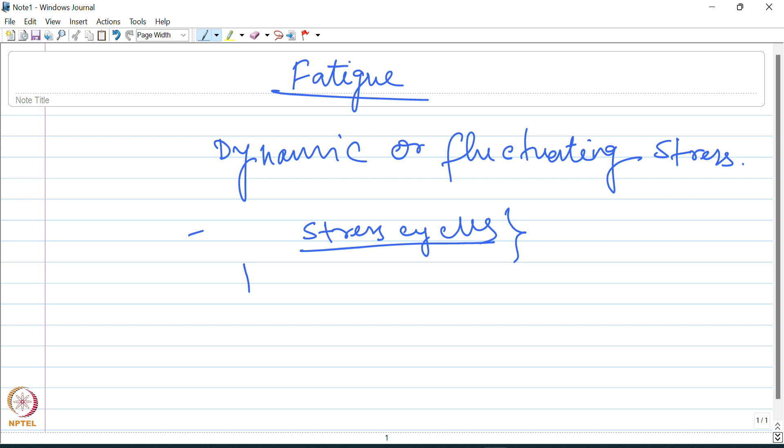Fatigue failures occur under the conditions of dynamic or fluctuating stress. At this point it will be good to know what kind of typical fluctuating stress cycles are generally encountered in engineering components. When you talk about these load cycles or stress cycles, you may have a completely reversed cycle such as this one, in the sinusoidal form. It first goes toward the positive direction to a peak and then comes down, going all the way to the negative direction with the same amplitude.

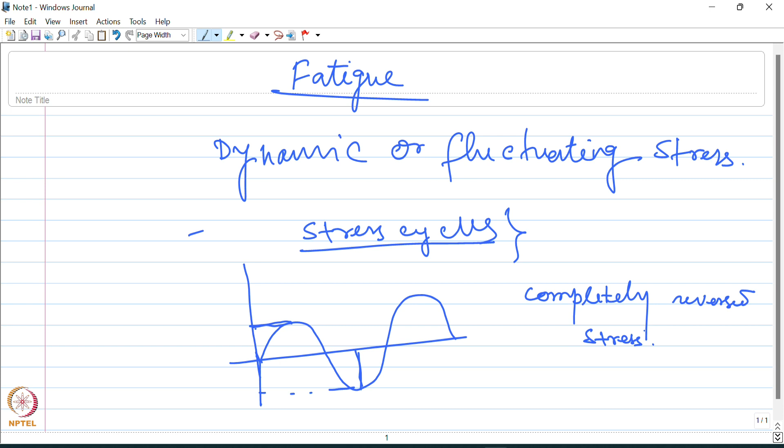When this occurs, this is known as a completely reversed stress. But it does not necessarily have to be completely reversed. There could be other kinds of fluctuations also. For example, you can have a stress cycle like this.

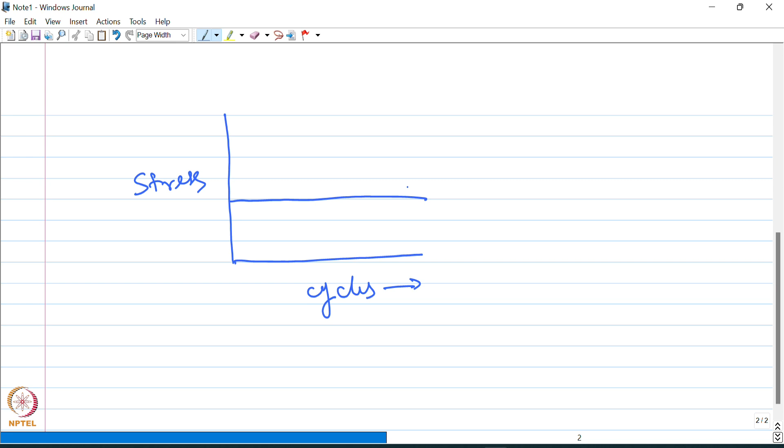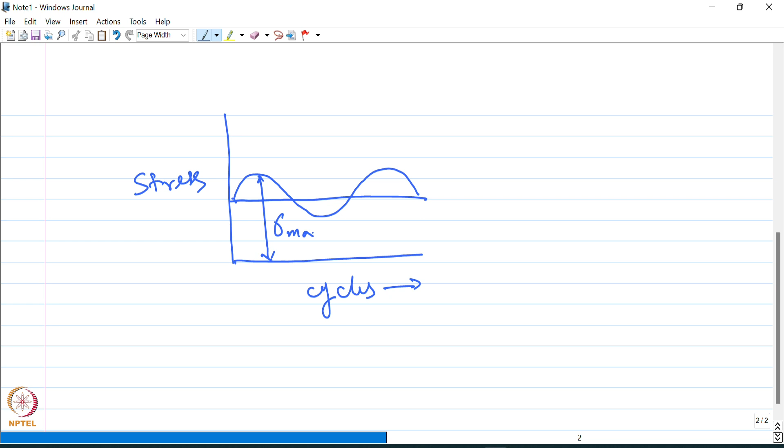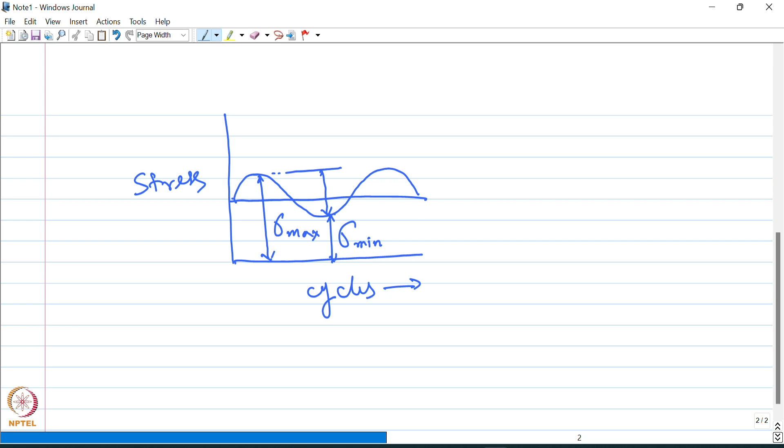In stress cycles, you have parameters such as the maximum stress sigma max, the minimum stress, and the stress range sigma r, which is equal to sigma max minus sigma minimum.

A stress cycle like this can be thought of as made up of two components mainly: a mean or steady stress sigma m, which is nothing but sigma max plus sigma minimum divided by 2, and an alternating or variable stress sigma a.

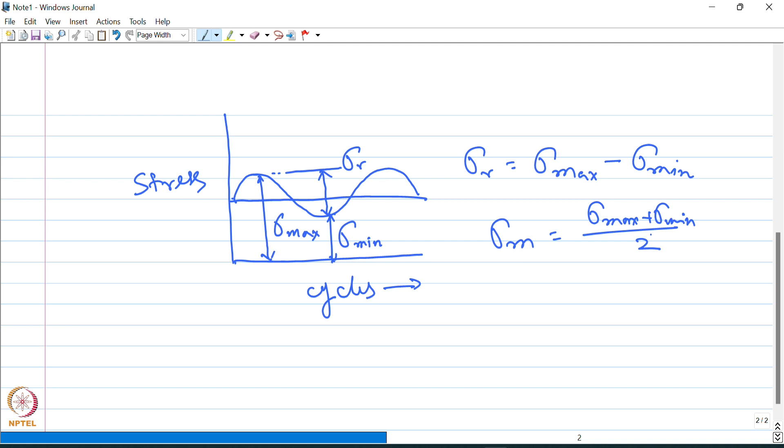Apart from this, as I said before, you also have the stress range sigma r. So in the previous case, when it is completely reversed, sigma minimum and sigma maximum are equal and opposite to each other, and in that case, the mean stress will be 0.

But as I said, it doesn't have to be always completely reversed. You might have a case like this where sigma max and sigma minimum are not equal to each other. And then you may also have a random stress cycle like this.

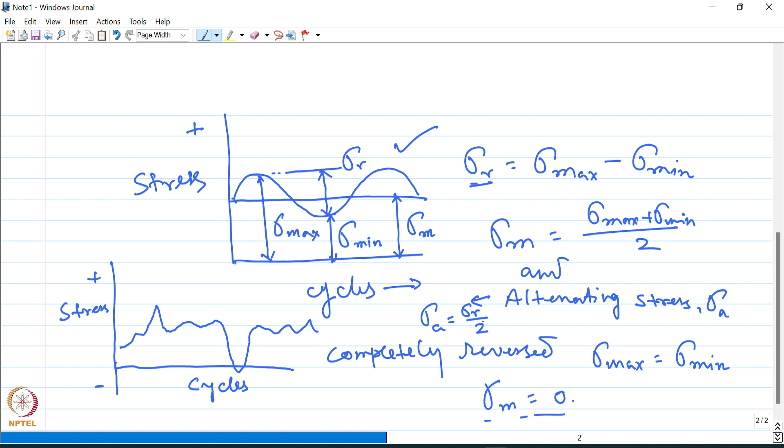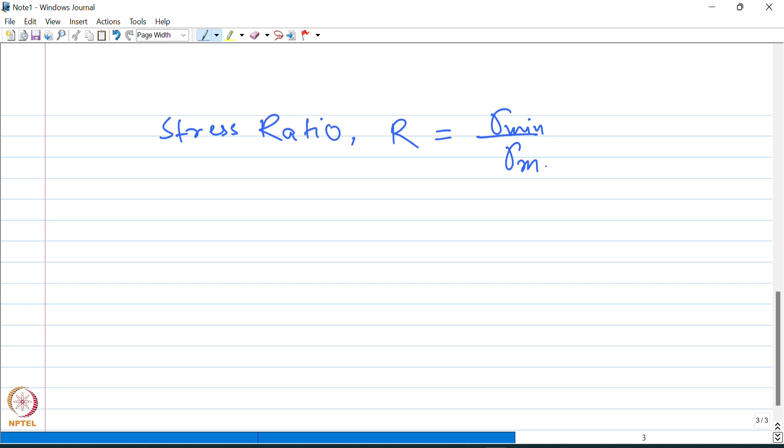There is one more parameter that is considered in fatigue, and that is the stress ratio written as R, and it is equal to sigma minimum by sigma maximum. So for a completely reversed stress cycle, R will be equal to -1.

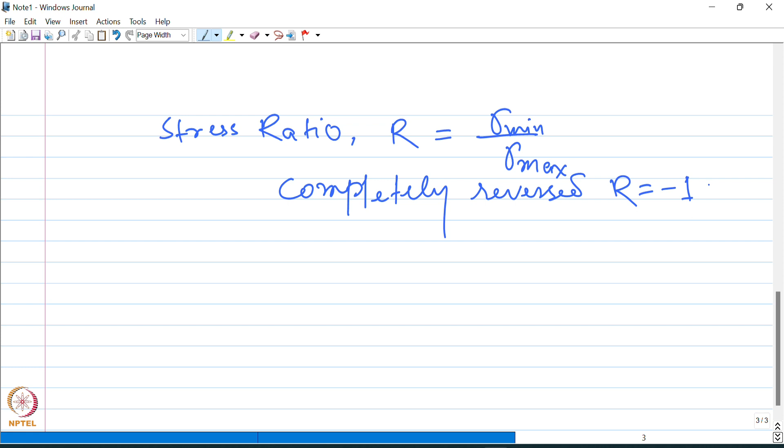There is one more parameter called amplitude ratio A, which is given as sigma A by sigma M, and if you write it in terms of R, it will be 1 minus R by 1 plus R. So these are the different parameters with regard to the fatigue test or the fatigue property.

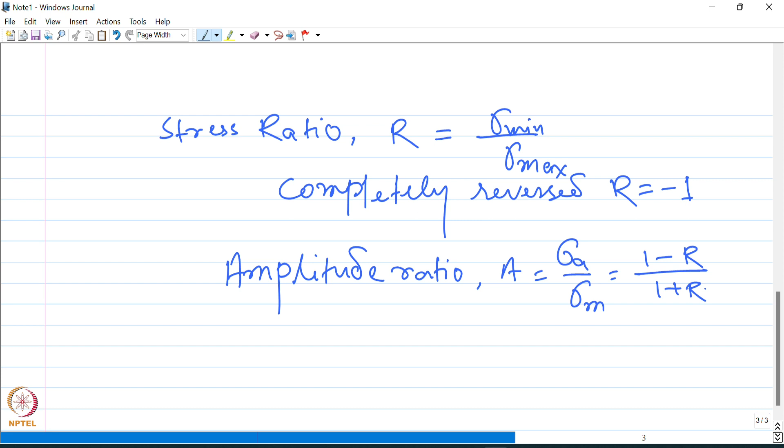Now let us see how the fatigue data is represented. The fatigue property is generally represented as a fatigue life in terms of the number of cycles to failure at a particular stress. So the fatigue data is collected as a function of number of cycles at a particular stress.

This kind of curve obtained in this manner is known as the SN curve, that is stress versus number of cycles to failure. Generally the data is collected under completely reversed stress conditions. As the stress is increased, the number of cycles to failure or complete fracture will decrease. So this curve would typically look like this.

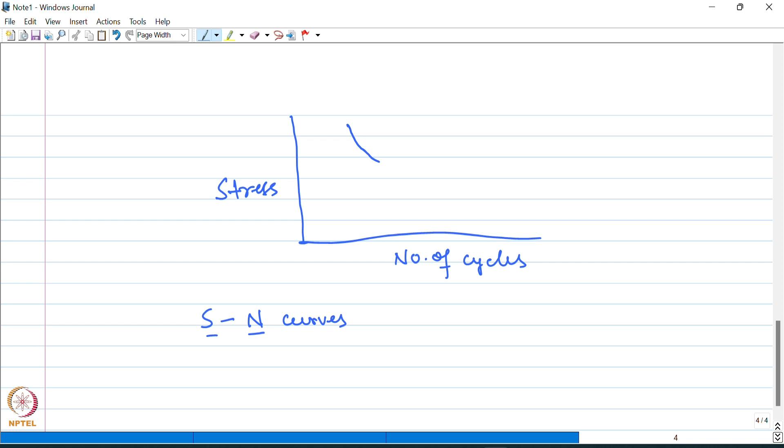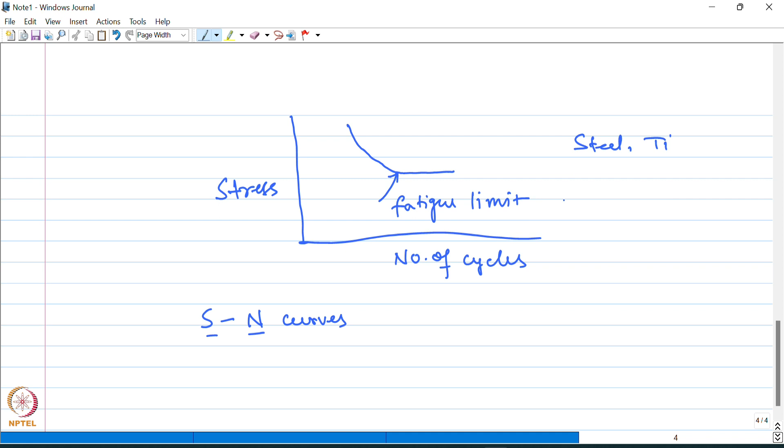For many materials like steel and titanium, this curve will become horizontal after a point. That particular stress at which it becomes horizontal is known as the fatigue limit of the material. This is also known as the endurance limit.

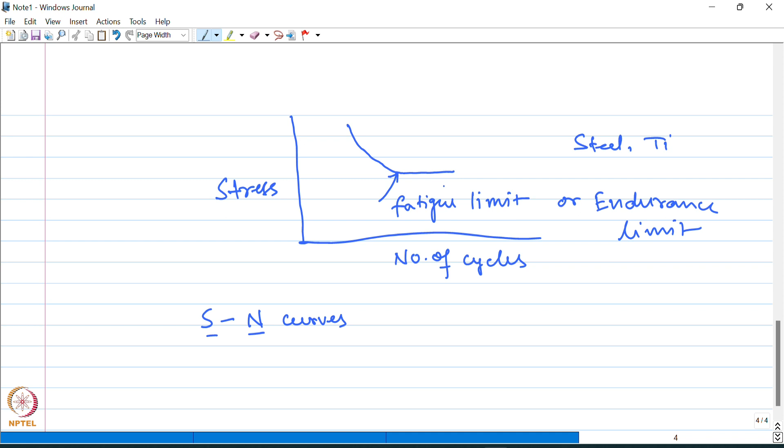But there could be materials where this curve does not become flat, rather it continues to go down. For materials such as aluminium and magnesium, that is what you will see. The curve goes down progressively as the number of cycles is increased.

In such materials, there is no well-defined fatigue limit as such, and therefore for such materials, the fatigue life is defined at a particular number of cycles, for example 10 to the power 8 cycles. So the fatigue life is given with respect to a particular number of cycles, a high number of cycles such as 10 to the power 8 cycles.

The stress at which the material can go up to 10 to the power 8 cycles, or the stress corresponding to 10 to the power 8 cycles, will be taken as the fatigue strength of the material, in cases where there is no well-defined fatigue limit. This curve can be expressed by an equation, where N and sigma A have already been defined before, and P and C are empirical constants.

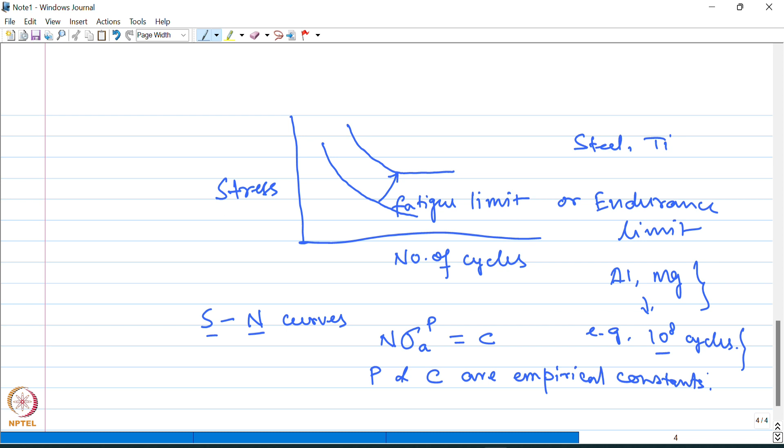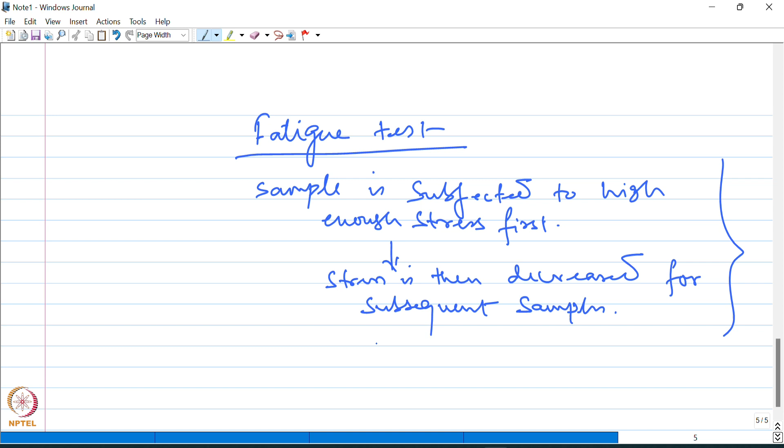Now let's talk about the fatigue test and how these curves are generated. The test is conducted by subjecting the material first to a high enough stress where failure is expected at a fairly smaller number of cycles, around two-thirds of the tensile strength. The test stress is then progressively decreased for succeeding specimens until at one point the specimen does not fail at that stress. This continues till a specimen does not fail at a low enough stress. When the data is plotted in this manner, it gives rise to the SN curve.

Whatever we have discussed so far was under the condition of completely reversed stress cycle, where R is -1 or sigma m is equal to 0. But practically it is very likely that the stress cycle may not be completely reversed. So we need to consider how the material behaves when subjected to a stress cycle which is not completely reversed. Let us see how the fatigue data is represented in that case.

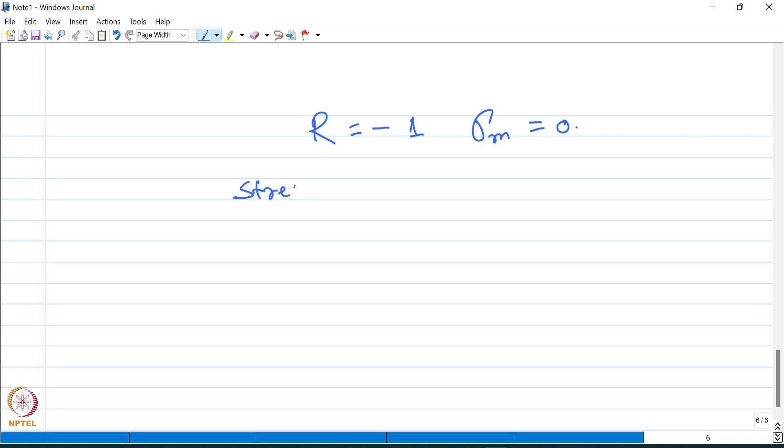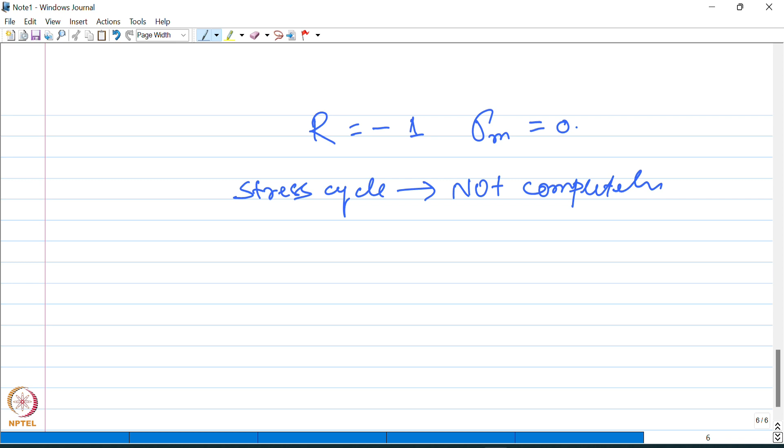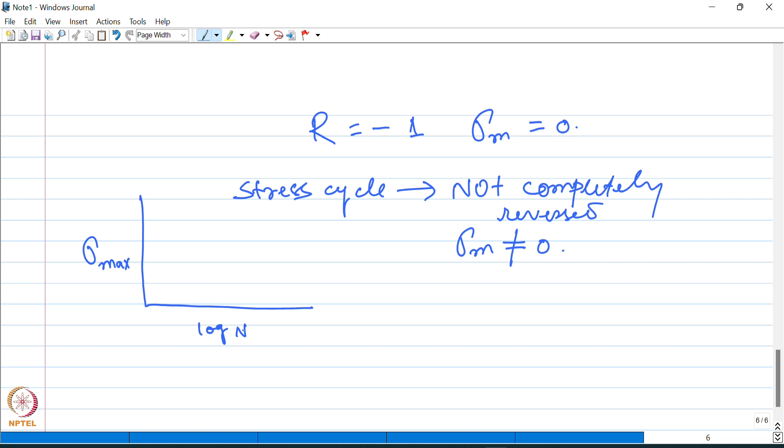There are several ways of determining the SN curve for a scenario where the stress cycle is not completely reversed. For example, it could be the stress at a particular stress ratio. So the maximum stress can be plotted against log of number of cycles for a fixed value of R. Let's say R is equal to plus 0.3.

The same data can be collected at different values of R. For example, R could be 0, then it could also be negative, such as minus 0.1 or even -1.

Here you can note one thing: as the stress ratio becomes more positive, which is equivalent to increasing the mean stress, the measured fatigue limit increases. As you can see, the fatigue limit, that is the point at which it becomes horizontal, increases as the value of R becomes more positive.

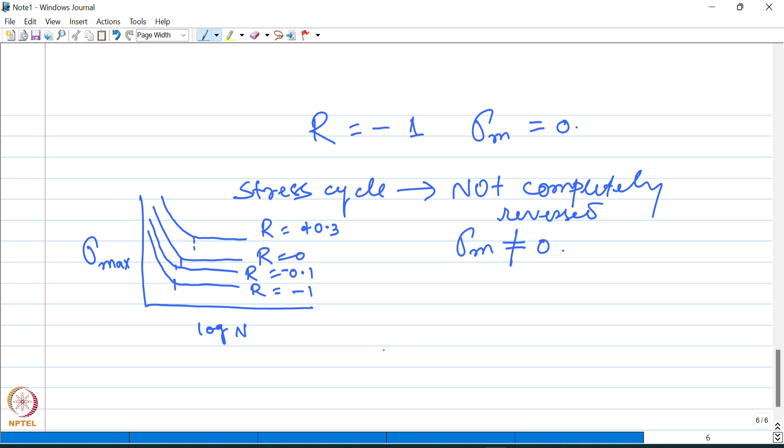The other way of determining the fatigue life in this kind of loading condition, where it is not completely reversed, is by plotting the alternating stress sigma A against the number of cycles to failure at a fixed value of mean stress. Let's say this is for sigma m1, and then the mean stress is varied.

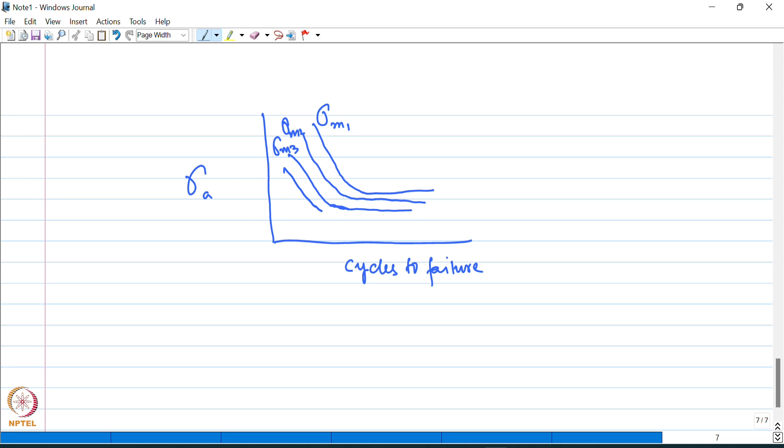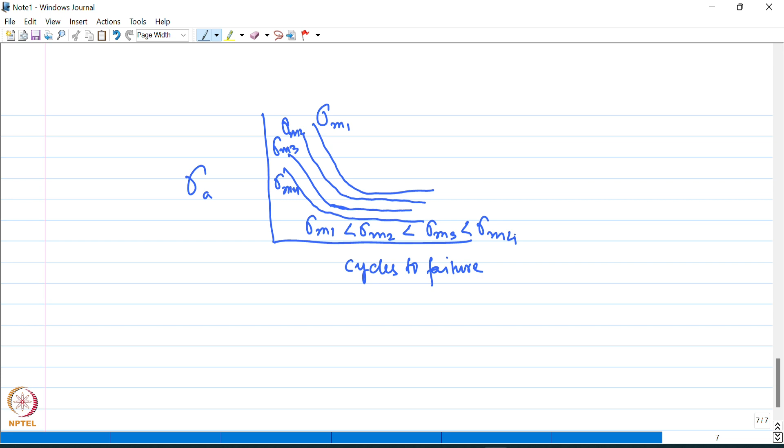Here sigma m1 is less than sigma m2, which is less than sigma m3, and that is less than sigma m4. So here you can note that as the mean stress becomes more positive, the allowable alternating stress decreases.

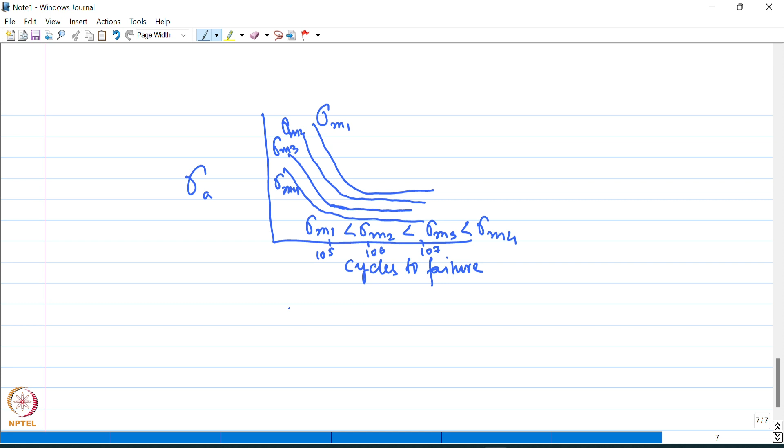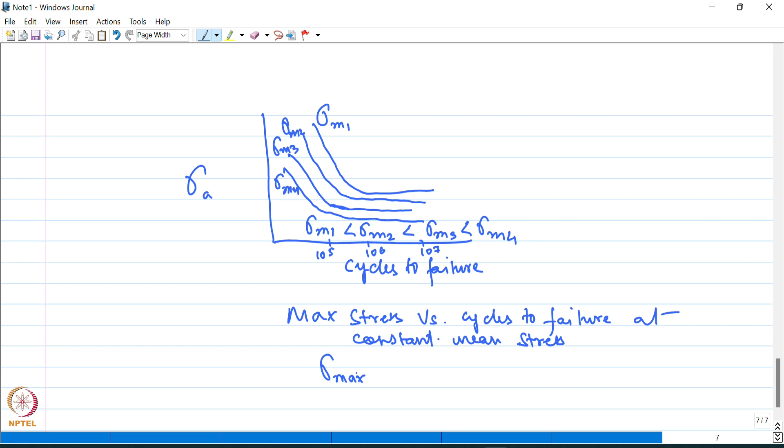There are other ways also to plot this data. For example, the maximum stress versus the cycles to failure at constant mean stress, and maximum load versus cycles at constant minimum stress, for example. So these are the other ways of plotting the fatigue data when the stress is not completely reversed.

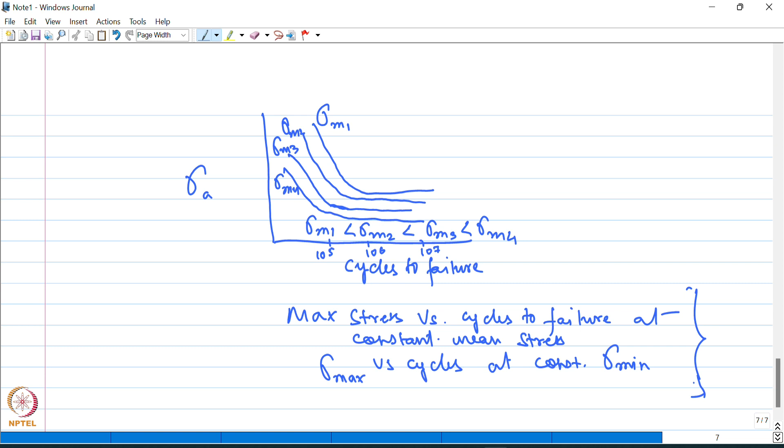The other thing that can be noted about fatigue data is the fact that for each mean stress, there is a different value of the limiting range of stress. This relationship between the mean stress and the stress range can be represented through a plot known as the Goodman diagram.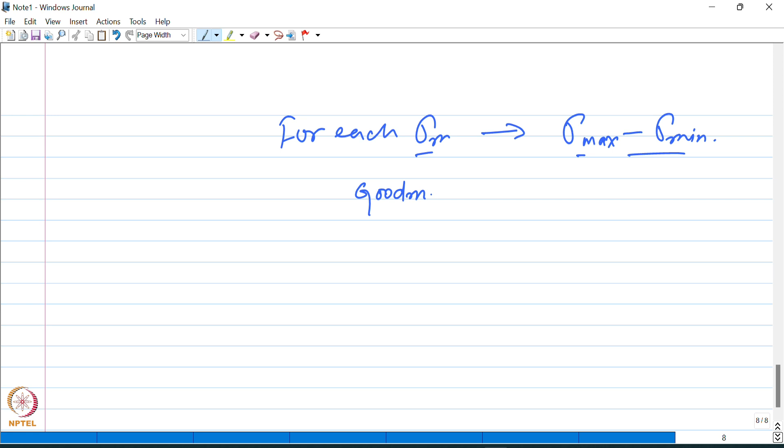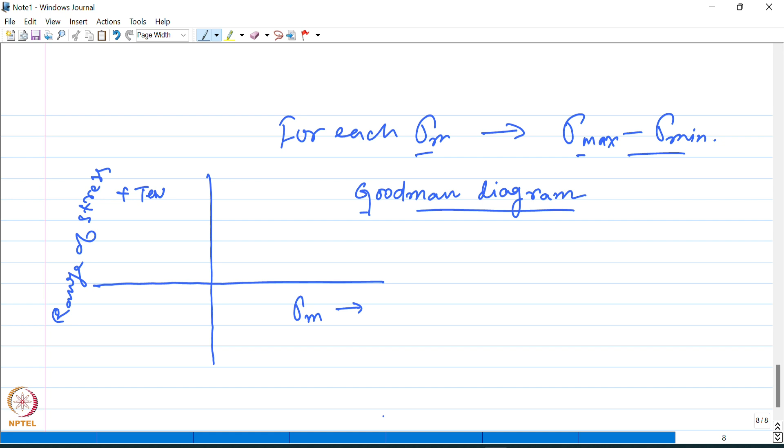So here, if we plot the range of stress along the vertical axis and mean stress along the horizontal axis, then you would get plots like this.

Here sigma u is the ultimate tensile strength of the material, and sigma naught is the yield strength. This plot or relationship is obtained for a fixed number of cycles, or at the fatigue limit of the material. You can see that as the mean stress becomes more tensile, the allowable range of stress is decreasing, until it reaches the tensile strength sigma u. As it reaches the point where the stress is equal to the ultimate tensile strength of the material, sigma r becomes 0.

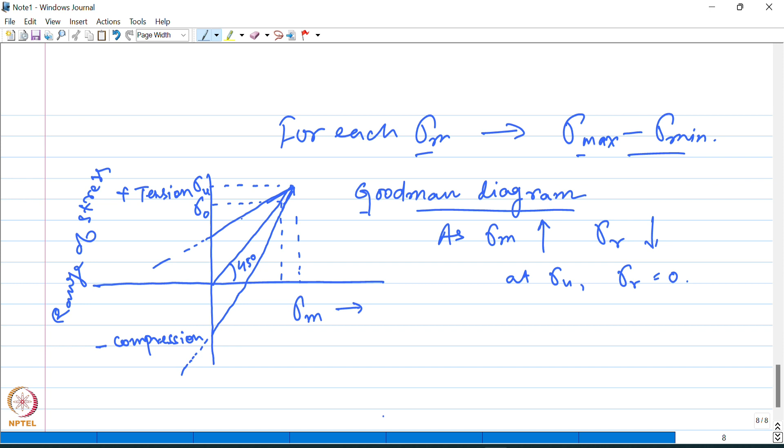Here this is the alternating stress sigma a, and sigma r is the difference between the maximum and minimum. So this is the sigma minimum curve, and this is the sigma max, the upper one, and therefore the difference is sigma r, or the range of stress.

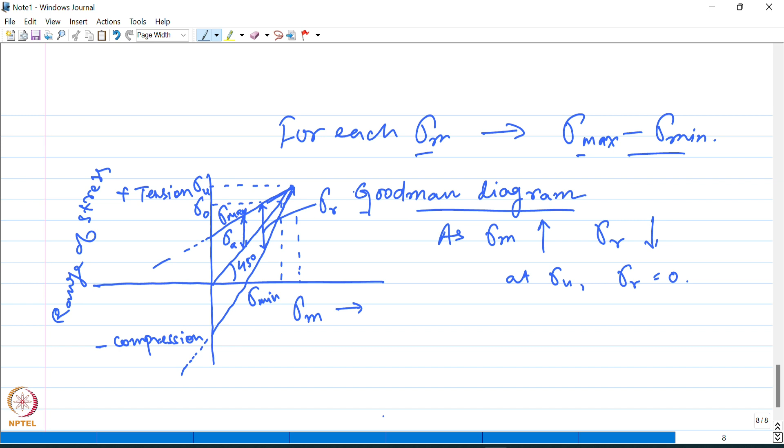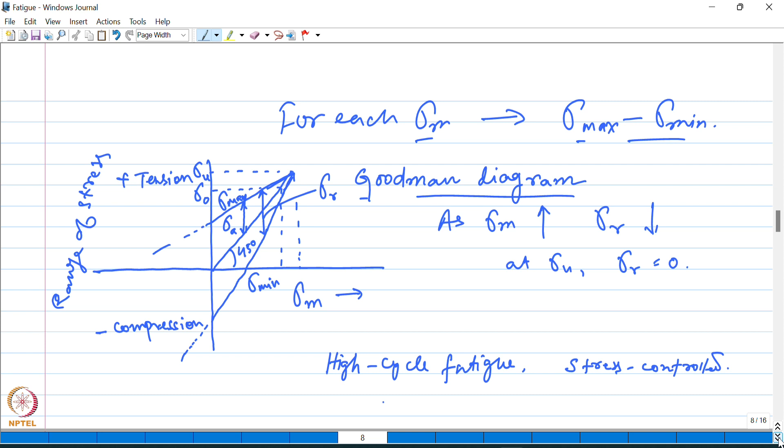The fatigue behavior that we have discussed so far is basically high cycle fatigue, and the data presented are basically from fatigue tests performed under stress controlled conditions. But scenarios are often encountered in which failure can occur at relatively high stress and low number of cycles. Such fatigue is known as low cycle fatigue, which occurs at high stress levels.

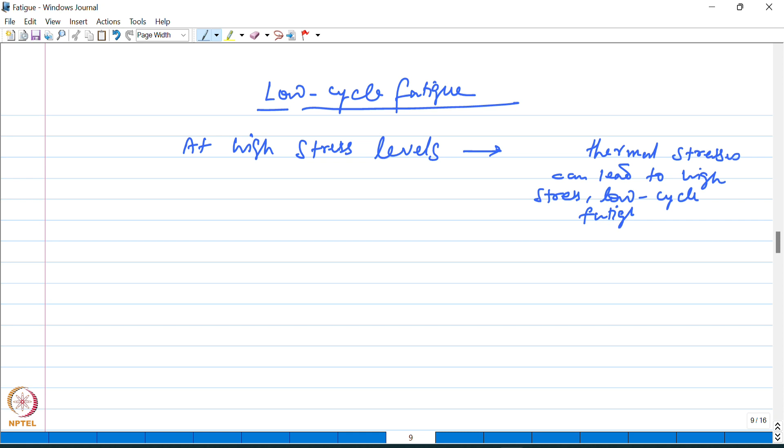Stresses of thermal origin, or thermal stresses, can lead to such a scenario. In these cases, fatigue occurs not due to cyclic stress, but rather due to cyclic strain.

So in order to understand low cycle fatigue, we will have to consider data generated from strain controlled fatigue tests. If you look at the stress strain curve generated under such conditions, when the strain amplitude is held constant, it will look like this.

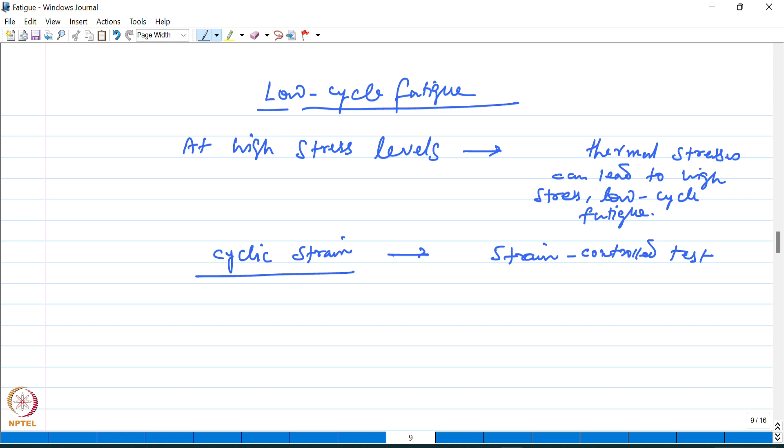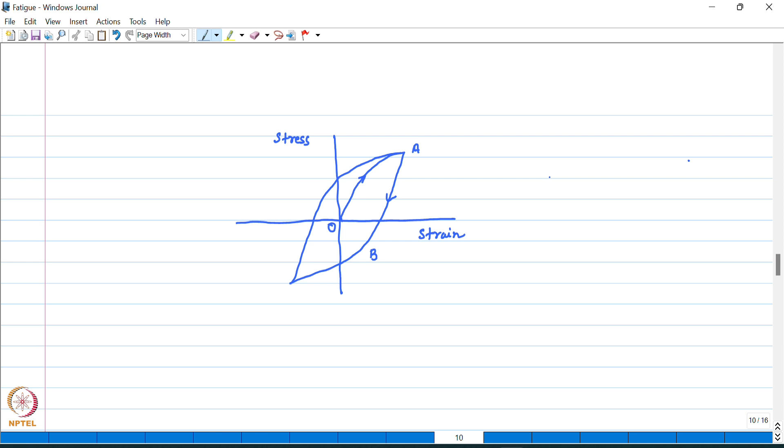So the lowering of the yield point when deformation in one direction is followed by deformation in the opposite direction is known as the Bauschinger effect.

Now, if it is again reloaded in tension, a hysteresis loop will develop, as you could see from here. The dimension or width of this hysteresis loop will be given by the strain range delta epsilon.

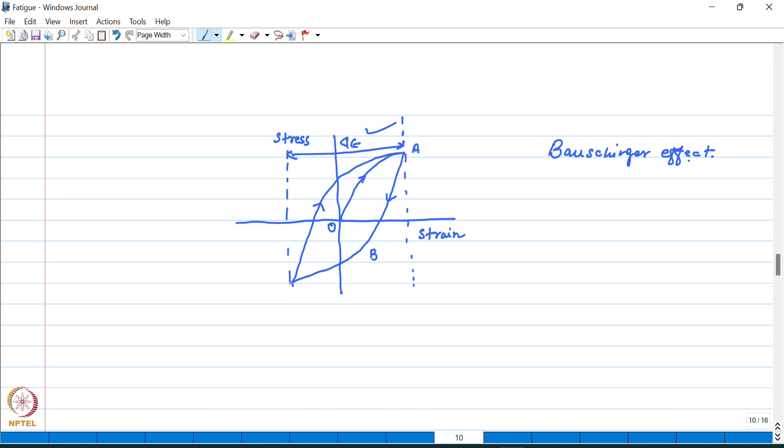You can also note that the total strain consists of an elastic strain, delta epsilon E, and a plastic strain, delta epsilon P. So the total strain delta epsilon T is equal to elastic strain delta epsilon E plus plastic strain delta epsilon P.

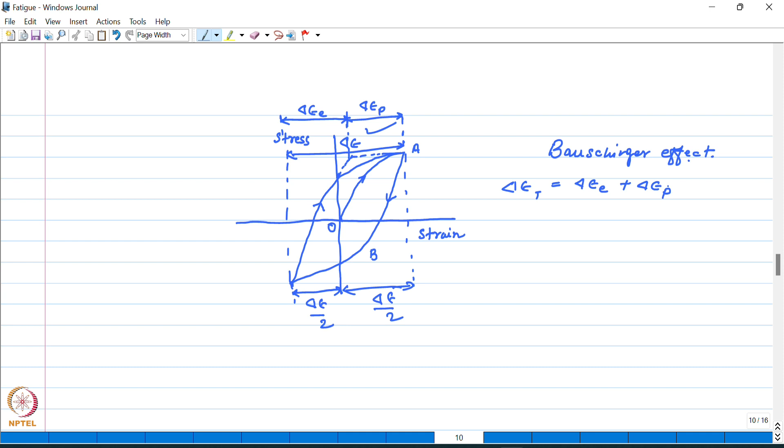The material may undergo cyclic hardening or softening, or may remain stable, but ultimately during the deformation process a stage will be reached where stable stress strain loops will be developed. So if you look at this cyclic stress strain curve, that can be found by joining the end points of these stable loops which develop.

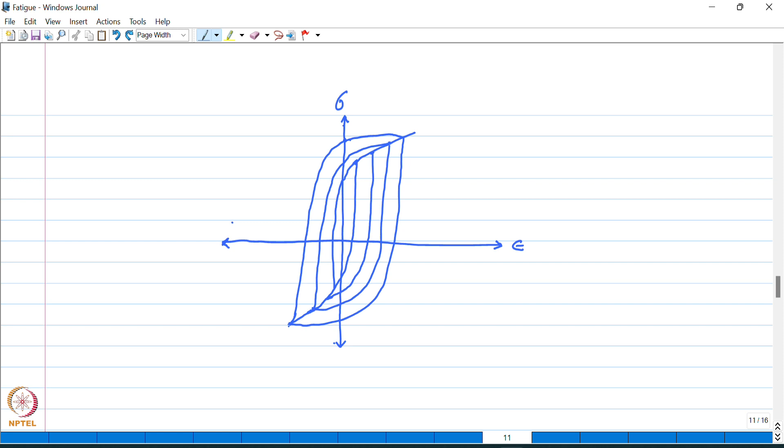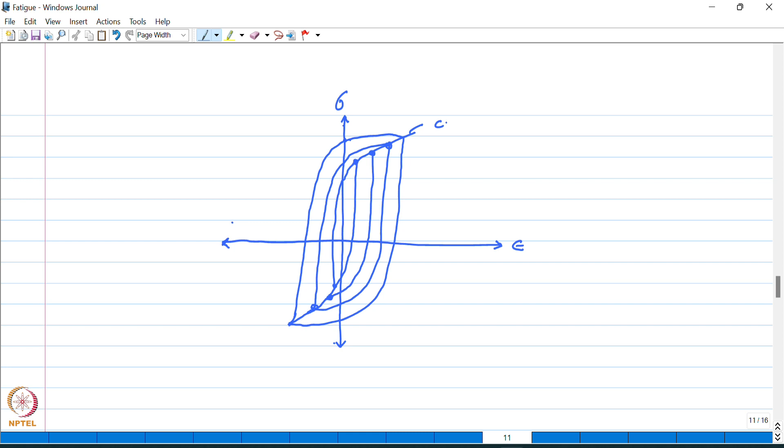So these are the developed stress strain loops, and if you join the endpoints, you will get the cyclic stress strain curve. The monotonic stress strain curve is somewhere here.

And the cyclic stress strain curve can be defined by this equation, similar to the power equation which defines the plastic flow during monotonic loading. So N prime is known as the cyclic strain hardening exponent, and similarly K prime is the cyclic strength coefficient.

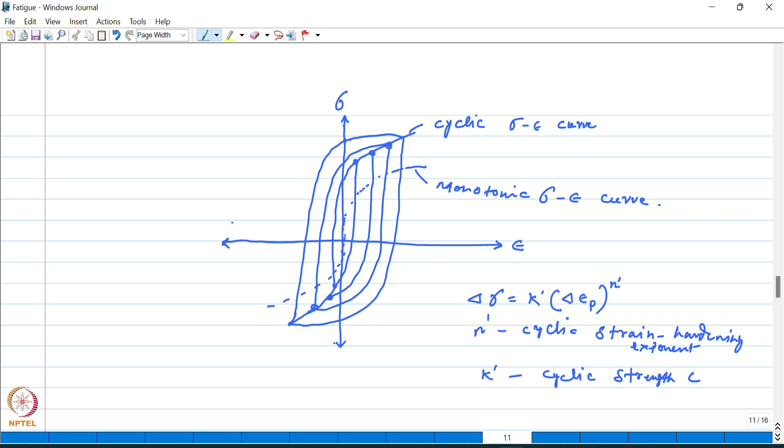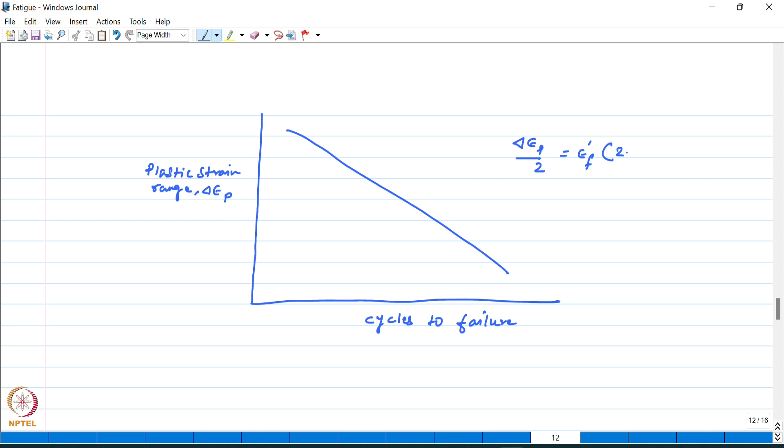And the usual way of presenting low cycle fatigue data is in terms of plots between plastic strain range and cycles to failure. This is basically a straight line like this, which is given by this relationship, known as the Coffin-Manson relation.

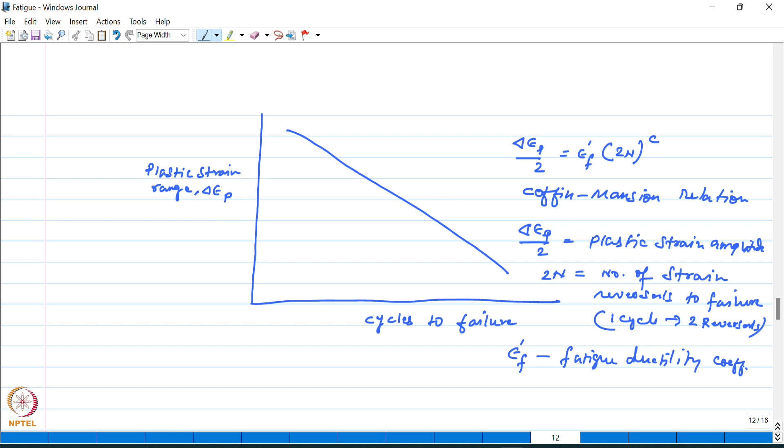Here delta epsilon P by 2 is the plastic strain amplitude, 2N is the number of strain reversals to failure, wherein one cycle is 2 reversals, and this parameter epsilon prime f is known as the fatigue ductility coefficient, which is approximately equal to the fracture strain for many metals. So this is how the low cycle fatigue data is presented.

Alright, let us take a summary before finishing this lecture. To summarize, we can say that engineering materials can also experience dynamic loading conditions, and under such load or stress, the failure which occurs is known as fatigue, and this generally occurs at a much lower load compared to the yield stress, because this is a kind of cumulative damage which occurs in the material when it is subjected to dynamic loading conditions, and eventually after a certain number of load cycles the material will fail.

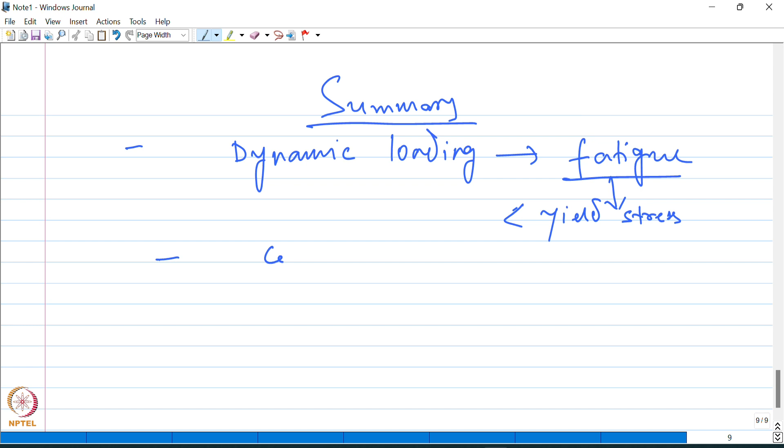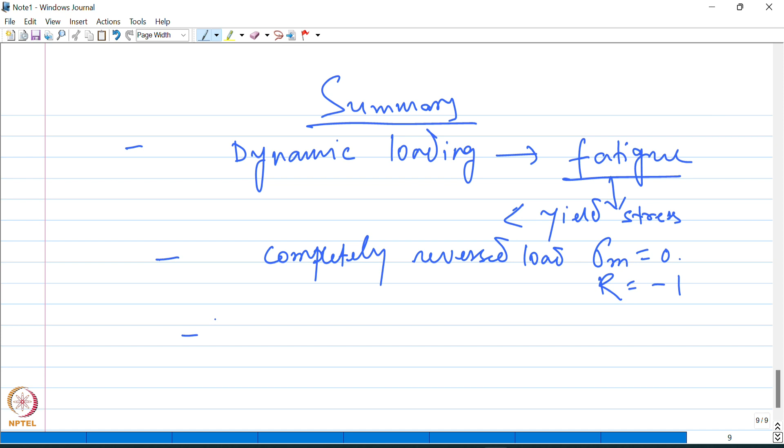And then we have defined different types of loading cycles. For example, the completely reversed load or stress where sigma m, or the mean stress, is 0, and the stress ratio is -1. We have also discussed how the fatigue data will look like, or how it is represented, when it is not completely reversed. In such cases, the fatigue data can be represented by plotting the stress, for example the maximum stress versus the number of cycles to failure, at a fixed R value.

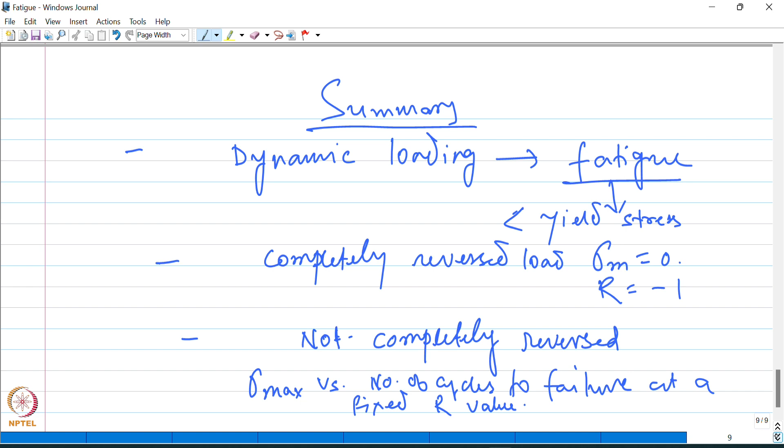R is kept constant by applying a series of stress cycles with decreasing maximum stress and adjusting the minimum stress such that it is a constant fraction of the maximum stress. That's how R is kept constant. It can then be plotted against the number of cycles, and you get a series of plots as you vary R.

Another common way of plotting such data, when the stress is not completely reversed, is plotting the alternating stress sigma A versus the number of cycles to failure at a constant mean stress. Here also, as the mean stress is varied, a series of plots can be obtained, a series of SN curves. We have seen that as the mean stress becomes more positive, the allowable alternating stress decreases.

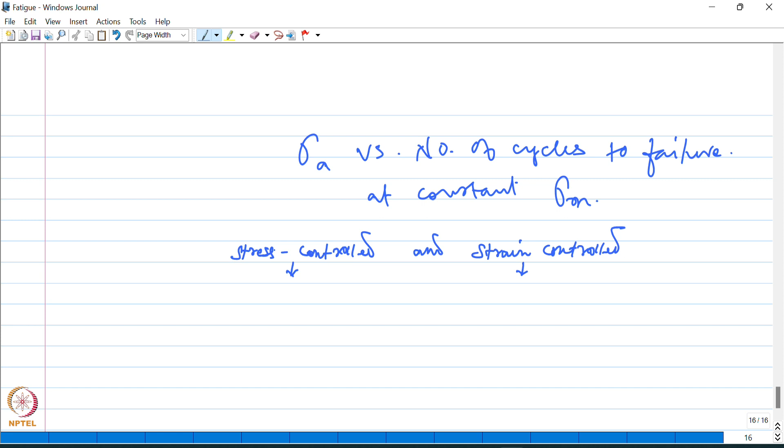We have also discussed stress controlled fatigue and strain controlled fatigue. Here, as the name suggests, the stress during the test is kept constant, and in case of strain control tests, the strain amplitude is held constant. The stress controlled case is given by the well-known Basquin equation, and the strain controlled case can be described by the Coffin-Manson relation.

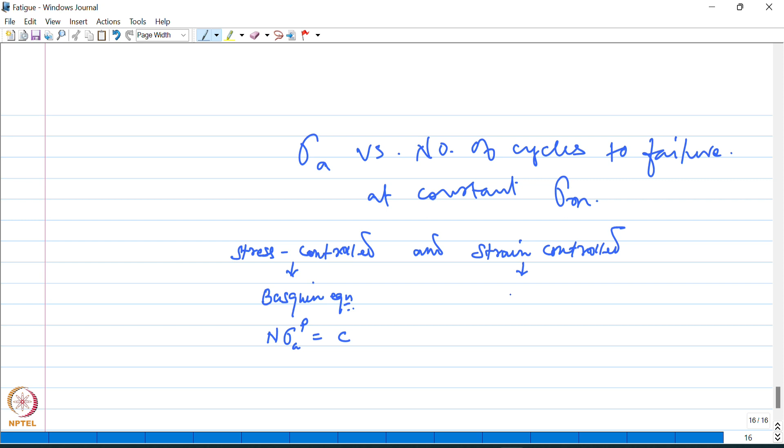And with that, we come to the end of this lecture, but there is more to come on this topic. Keep watching.